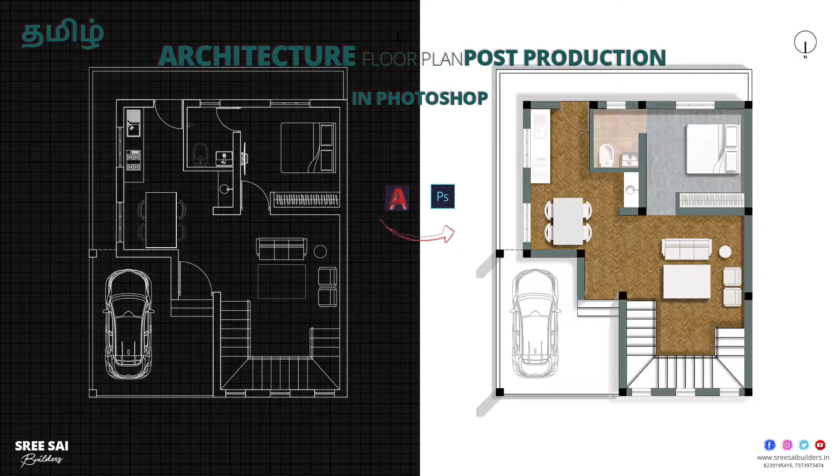First of all, create a new page, shortcut Ctrl+N, and set any paper size. Set the orientation like portrait or landscape, set resolution to 300 pixels, and background color white, black, or transparent. White is the better option because it feels like drawing on a white paper.

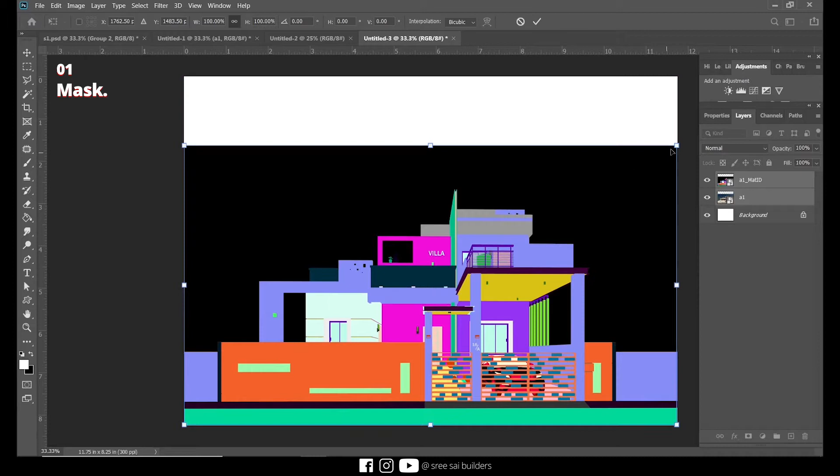Import a file into Photoshop. First tip is mask. If a picture has skies, trees, white backgrounds or other unwanted layers, instead of permanently deleting them, use mask to hide them.

When rendering, if you select the material ID option, you get different colors mixed into the image - this is called material ID. Click the material ID layer and use the magic wand tool (shortcut W) to select the black colors in the background.

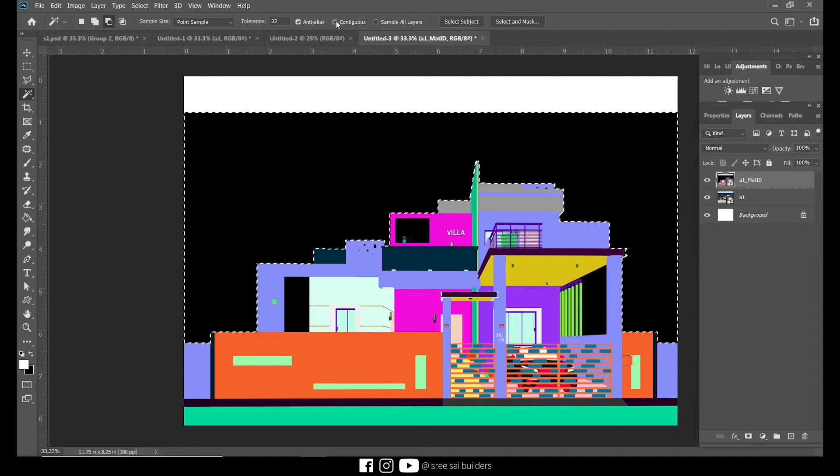You can select all black layers in this image.

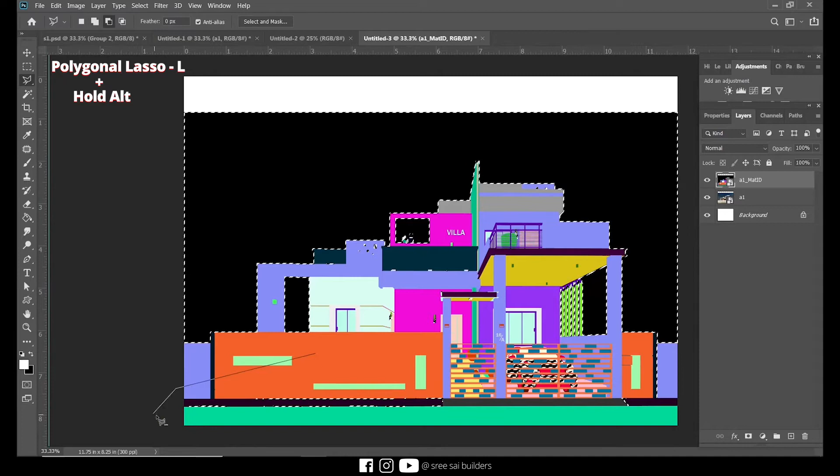Then use the polygonal lasso tool, shortcut L, to deselect unwanted selections by holding the Alt key. If you want any additional selection, hold the Shift key to select.

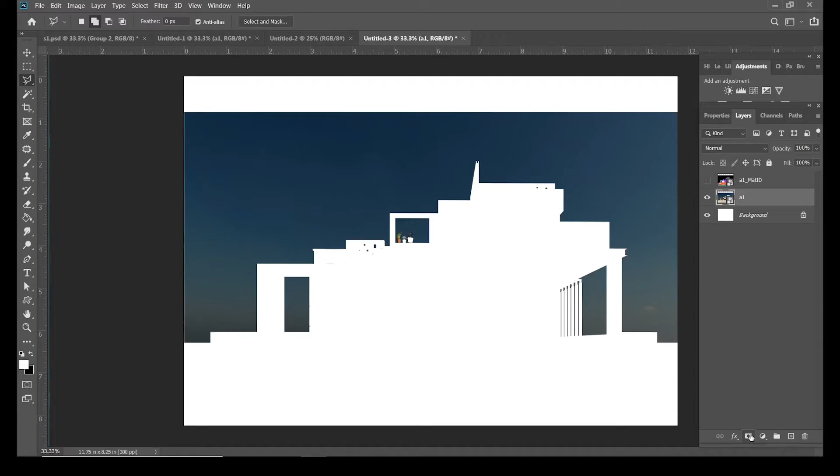Now we've selected all the background and got the final result. Select the main render image layer and add a layer mask. Now everything except the selected layer is hidden, but we only want the selected area to be hidden. So hold the Alt key while adding the mask layer to reverse the selection, and now we can change the background skies easily.

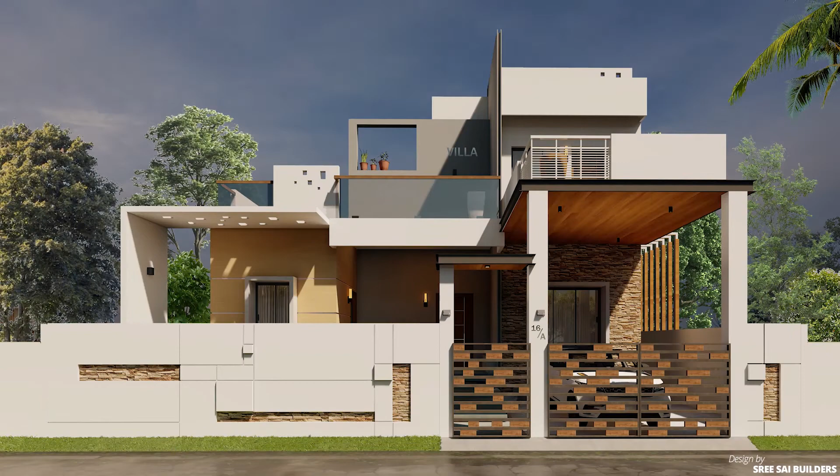Second tip is specular. Select the specular layer, go to blending mode, and pick the screen option. This gives more reflection in the glass edges and other reflective areas - it's a very effective option in post production.

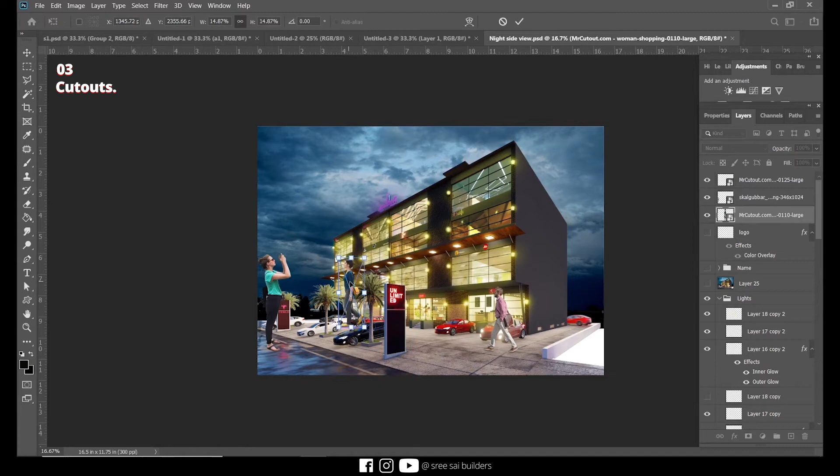Third one is import cutouts. Import cutouts into Photoshop and place them in the position where you want. Fix the height of the cutouts using the ruler scale, shortcut Ctrl+R. To scale your cutout to destination height, press Ctrl+T and rescale it.

Fourth one is motion blur. Select the layer and go to Filter, select Motion Blur, and change the angle and distance.

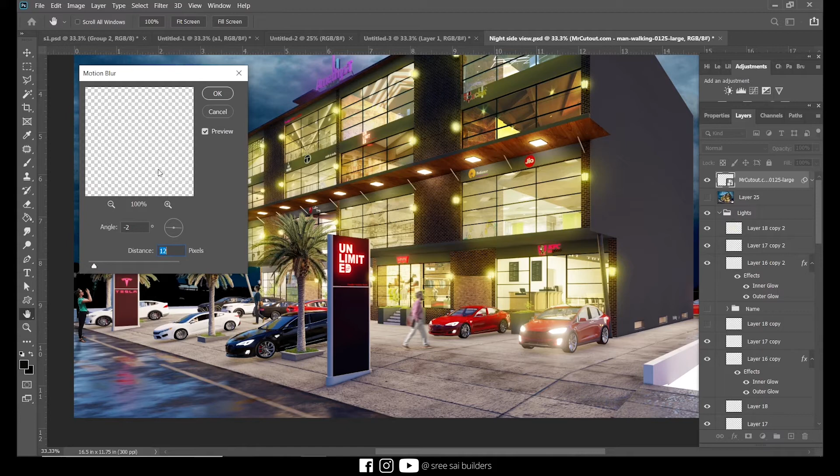Fifth one is shadow. First copy the cutout using shortcut Ctrl+J. Right click over the copied layer, select the Distort option, and place the copied cutout layer to touch the ground in the opposite direction of the light rays.

Then go to Hue/Saturation and decrease the lightness to make it dark. Apply motion blur to make it a little blurry, and pick soft light in blending mode. After that, change the opacity as per your need. Use the brush tool, change the round to flat, and paint over the shadow - this gives a more realistic look to the picture.

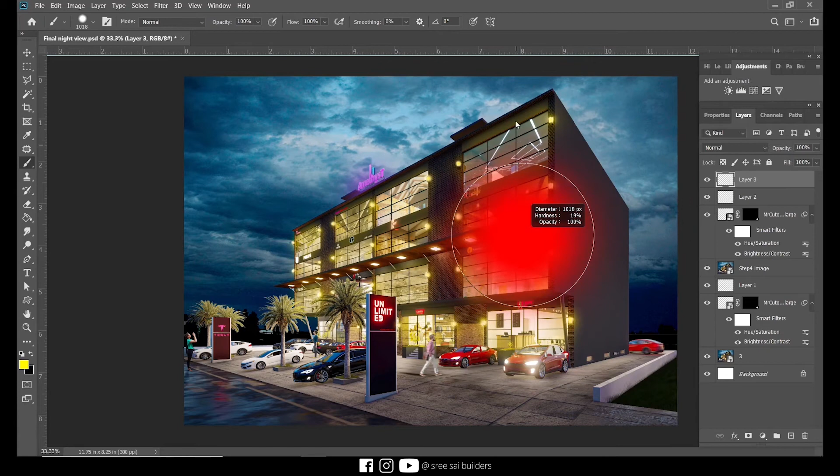Sixth one is brush setting, shortcut B. Hold Alt key and right click the mouse, drag left and right to increase or decrease the brush size, and drag up and down to increase or decrease the hardness of the brush. It's very simple and one of the time saving options.

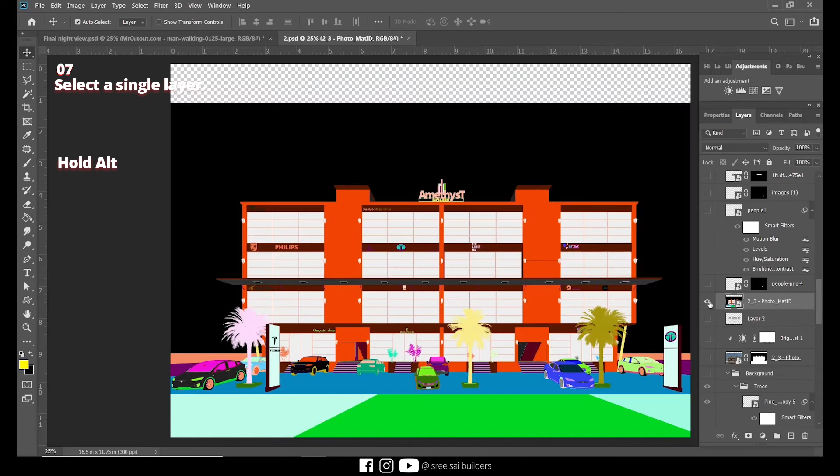Seventh one is select a single layer. We create so many layers while doing the post-production process. In order to select a single layer and hide all other layers, hold the Alt key and click over the layer. Now we can easily edit that particular layer.

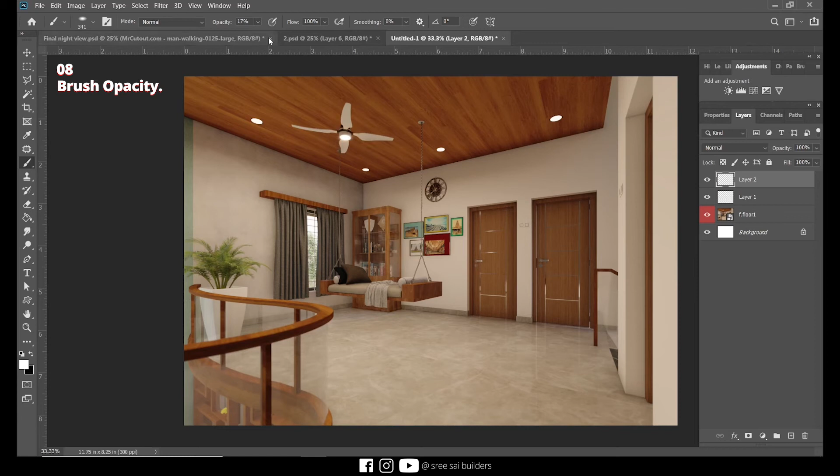8th one is opacity, one of the simple and time saving tips for post production. When using the brush tool, this option is very effective. Every time you use the brush, you drag the percentage in the opacity bar to increase and decrease it. Just press 2 and it changes to 20%, 6 is 60%, 9 is 90%. Type 0 and it goes to 100% opacity.

And last one is photo filter. Go to adjustment layer and pick the photo filter option. Adjust the density of that filter - you can change to any color, and it gives a pretty look and changes the mood of the picture.